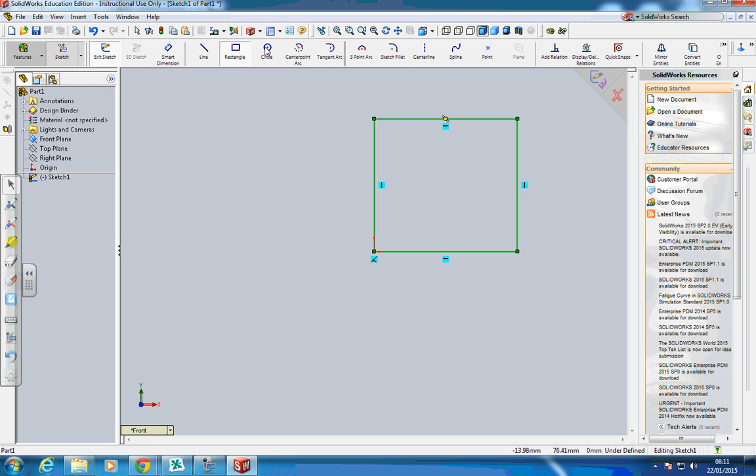I'm going to click on a new part, and start by going to Sketch, Rectangle, selecting the front plane, and drawing a rectangle. Then I'm going to use the Smart Dimensioning tool and dimension that to 100 millimeters by 100 millimeters, and zoom to all.

Features, extruded base, and I'm going to add a 20 millimeter extrusion. Toggle to show you, and then go OK.

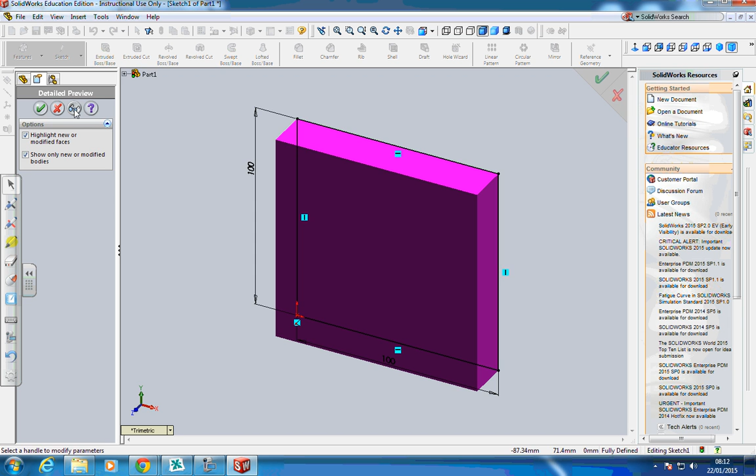Next, I'm going to select the face again, and insert another rectangle. This rectangle I'm going to make 75 by 75, and also constrain it to the edge.

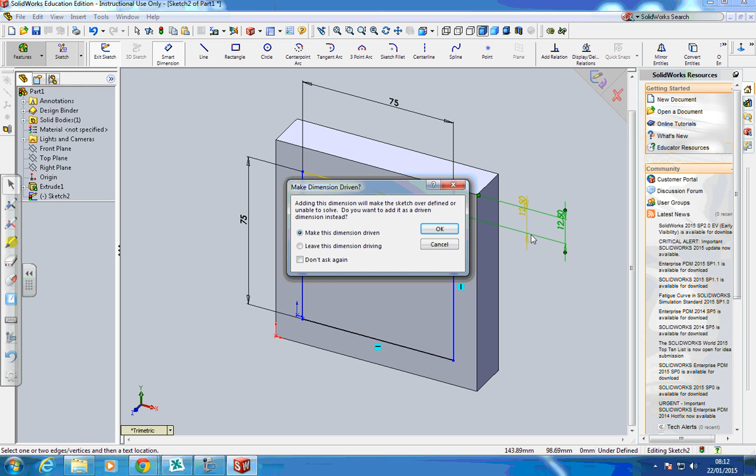Now a bit of maths involved here. I've got 100 take away 75, which gives me 25. Half of 25 is 12.5. I'm going to select from that edge there to that edge there, come out, and constrain this edge to this edge at 12.5, which will hold that in the center.

I'm then going to say yes, and extrude base by 20 again. I'm going to repeat the process on this surface.

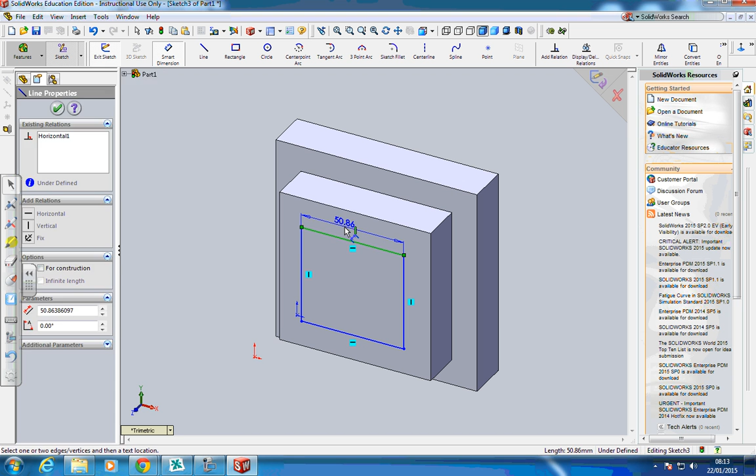Insert sketch, rectangle, like that. This one, you've probably guessed, is going to be 50 millimeters by 50 millimeters, and I'm going to constrain it to the edge once again by 12.5 millimeters, and to this edge, which will hold it in the center.

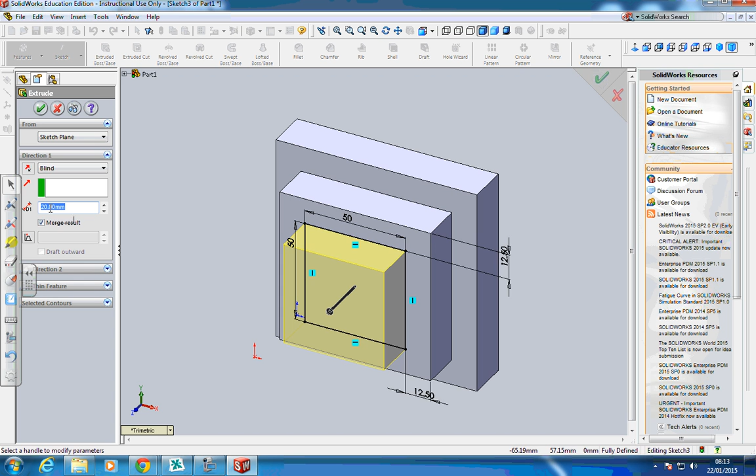Features, extruded base again, and 20 millimeters. There we go. I'm going to add one more onto this just because it would look better.

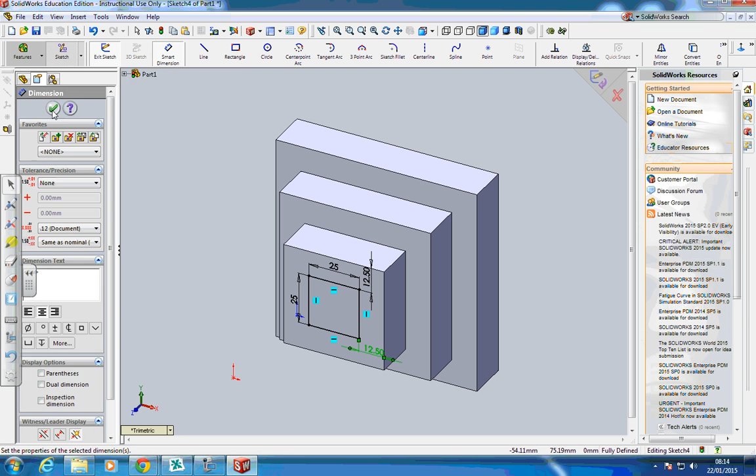Insert sketch, rectangle. That's going to be 25 by 25. And once again to the edge, 12.5 and 12.5. Extruded base, 20 millimeters.

Repeating the steps we've learned previously, I'm going to add a fillet to all of the edges, but only a very small fillet of 2 millimeters, on this face here, this face, that face.

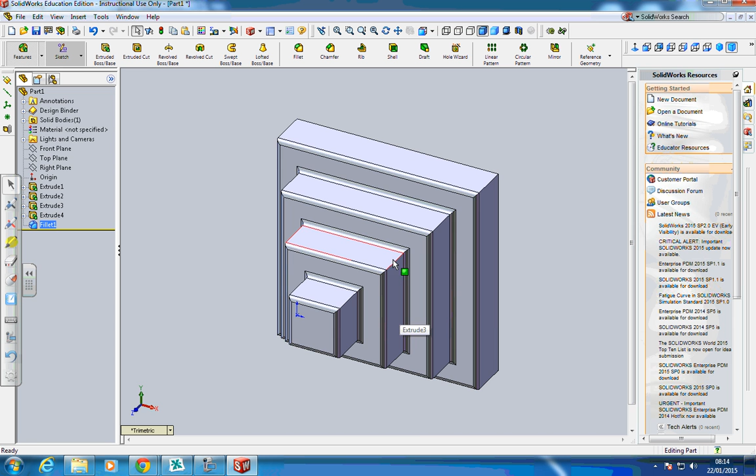If I then want to do the edges as well, I need to go around and select these individually, but I think that will be fine. With the edges, I'll need to go to fillet, select all of one side, rotate it round, and select the next 4.

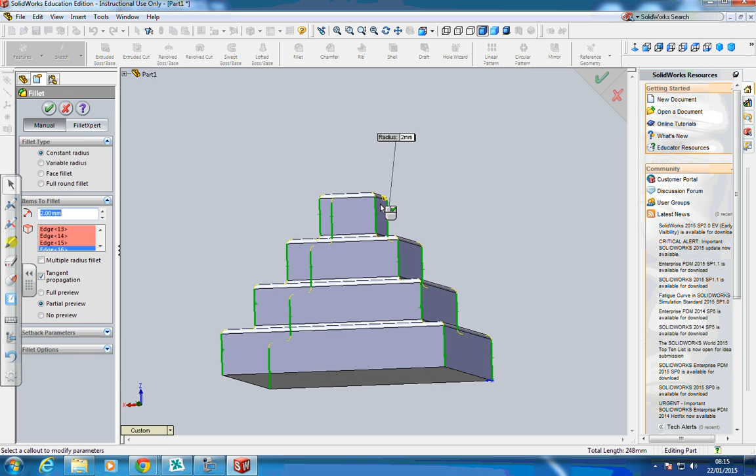You can see all of the lines turning red when I've got them selected. Once they are selected, they'll turn green. And there we go, so that is my pyramid.

Now what I'm going to do is shell out the inside to turn it into a hollow object. So I'm going to turn so I can see the bottom face, select the shell button, and click on the face.

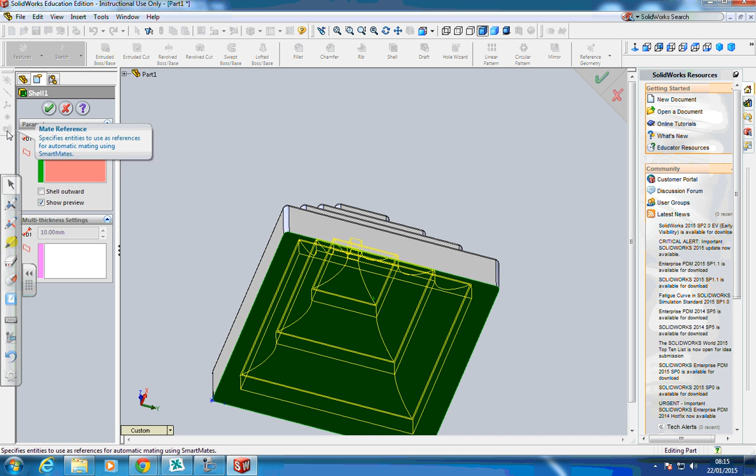That gives me an option. If I put preview on, it shows me what it's going to look like. Now I think a 10 millimeter shell is too much because I intend to 3D print this, so I'm going to change it to a 2 millimeter shell, and go OK, and that will hollow out the bottom like that. So that is how you would shell out an object.

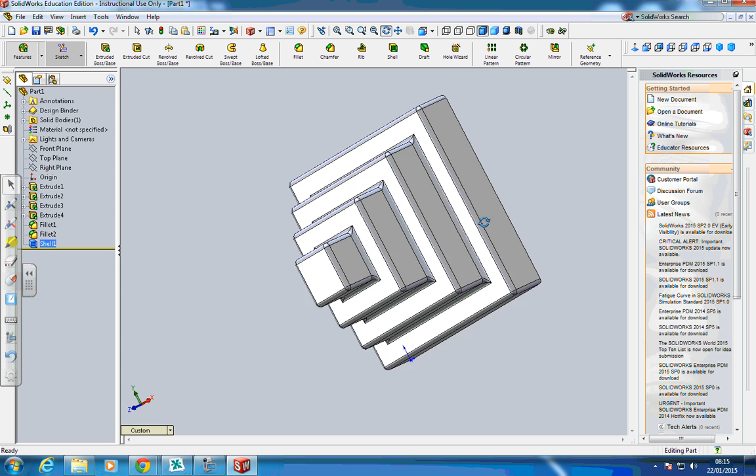Turn it back to isometric. You can see the final effect, and there is our 3D shelled out pyramid. Thank you very much for watching this demonstration. This concludes lesson 4.